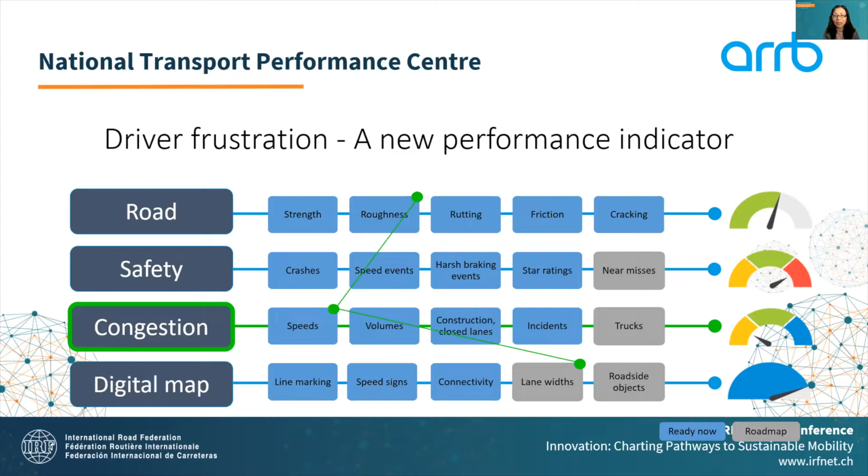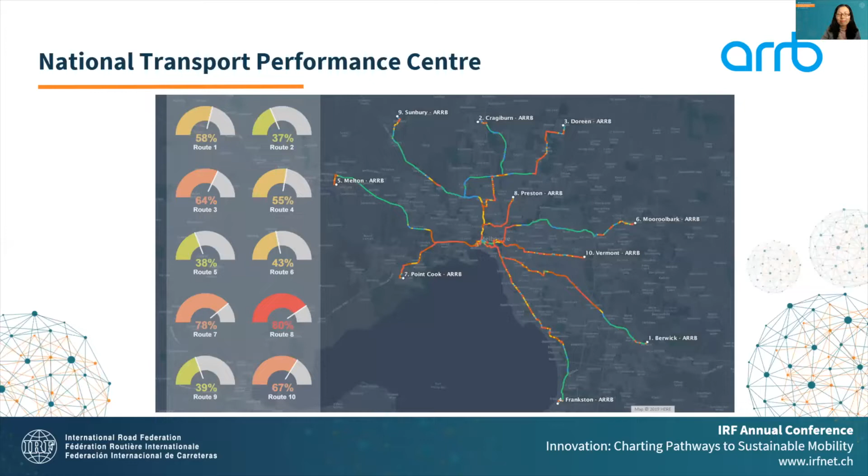I'd like to emphasize our next wave of data came from connected vehicles or vehicle-enabled data. This is another example I'd like to mention - we were able to utilize the data coming from HERE technology map, our research partner. This technology map was made available to many connected devices, such as vehicles, watches, or smartphones. The data from these devices covers a wide range of information, not only speed and location, but also information from vehicle sensors like wipers, hazard lights, and radar.

We were able to incorporate this data and create a hybrid model and data fusion to fill in many gaps of our congestion and reliability assessment. There's still a lot of potential to further utilize this data to fill in the gaps of a road conditions map.

As Australia New Zealand National Transport Research Organization, we constantly investigate or monitor the technology trend. Our investigation has confirmed that cloud connected vehicles are coming, and our vehicle OEMs are providing increasing levels of data connectivity.

Per our investigation, as shown in Austroads' Future Vehicles 2030 report, it is envisaged that by 2030 the majority of vehicles sold in the Australian market will have certain levels of data connectivity. At the same time, with the global growth of 5G subscriptions, it is also expected that more than 50% of mobile phone traffic will be carried by the 5G network by 2026.

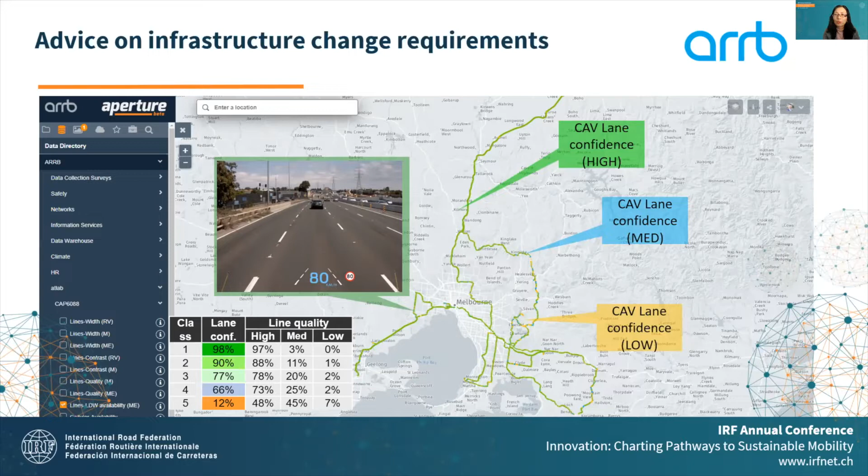Clarissa, maybe you should conclude because of the time pressure, if possible. No worries, thank you very much. And sorry. Thanks everyone. No, you can still have your conclusions if you like. One minute, okay, if you want.

Data sits on top of that, covering different sources. The logical element is the safety, operational, and regulatory element that would support a safe and efficient operation of this ecosystem. Processing and services sit on top to provide seamless services to different road users.

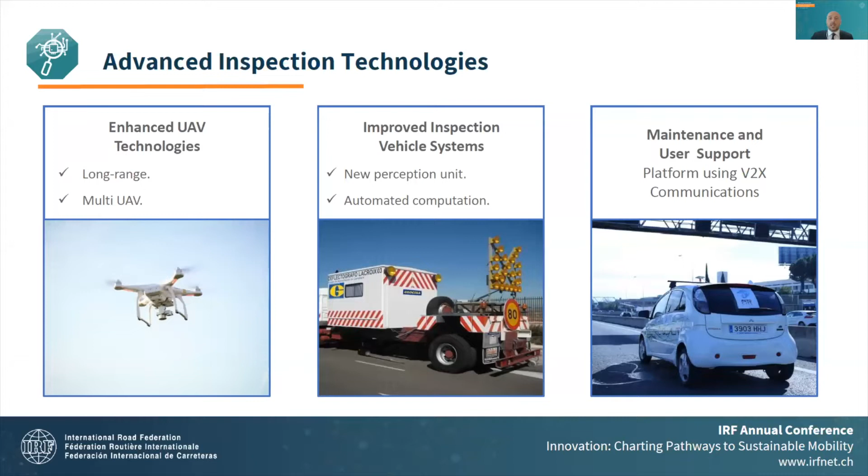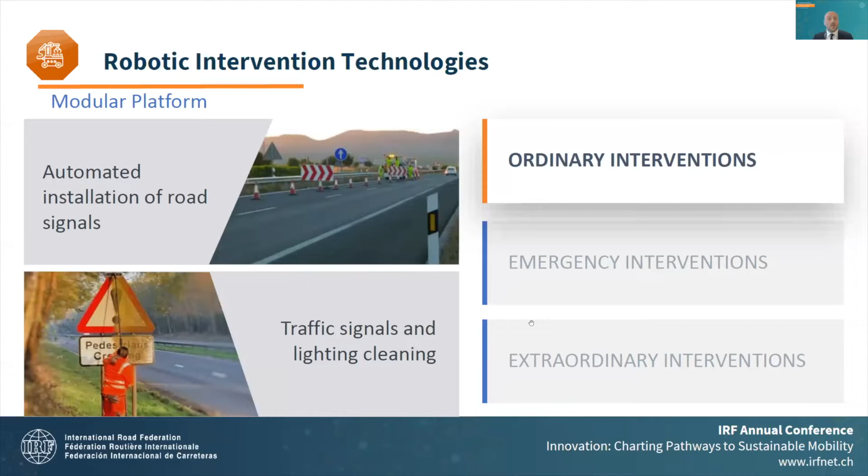Another component is the modular platform. Omicron will develop a semi-automated mobile manipulation concept formed by a robotic arm, which operates autonomously, mounted on a standard vehicle, in order to improve the safety and ease of installation of road signals on both the left and right side of the carriageway. A vision system will be developed to identify the presence of signals and estimate their relative position with respect to the robot, along with control logic to generate trajectories and activate the cleaning tool.

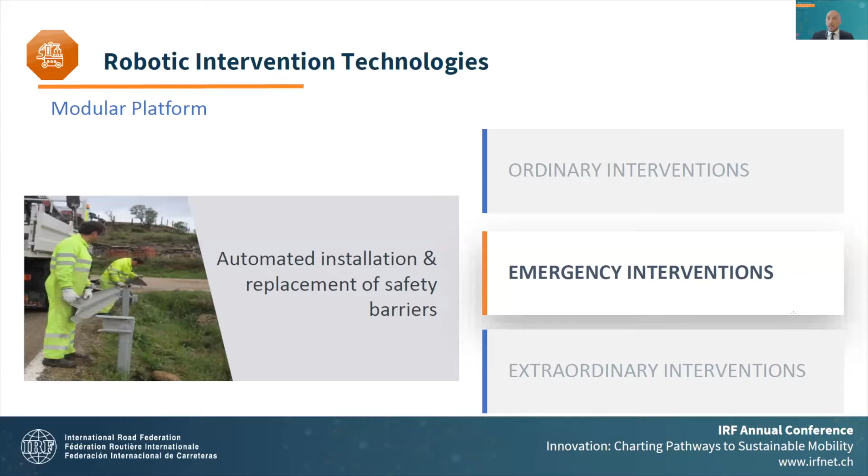Another tool is related to the automated installation and replacement of safety barriers, done by the robotic arm, which will take the barriers and place them in the right position, minimizing the risk for workers. Another tool is the removal and painting of horizontal markings, which is a very common and critical task.

Omicron will deploy a laser rod for paint removal to be operated with the modular robotic platform, avoiding the reduction in friction that can result in a risk of slip for vehicles. Regarding the sealing of pavement cracks, the current process will be automated by the use of a modular robotic arm, which will be able to operate the pipes of the machine and apply bitumen over the crack.

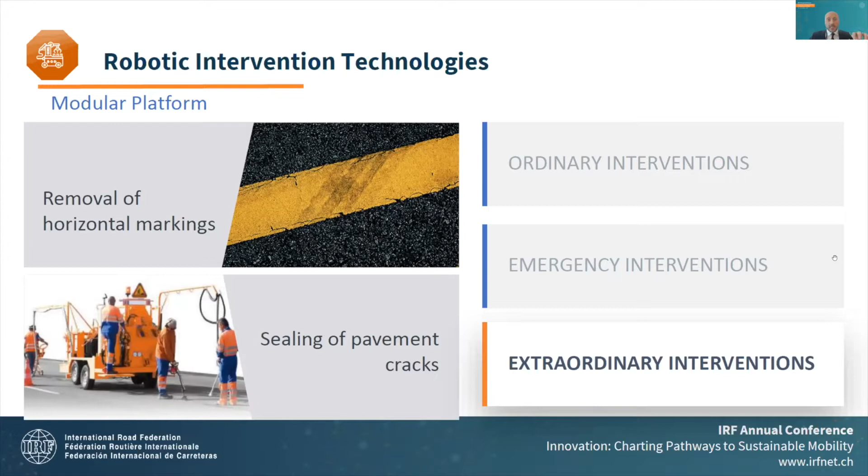Omicron will also automate the surface pavement layer rehabilitation activity, providing decision support information along the whole process, in order to improve it and enhance human operator decision, leading to a reduction in the overall cost of pavement by increasing its useful life.

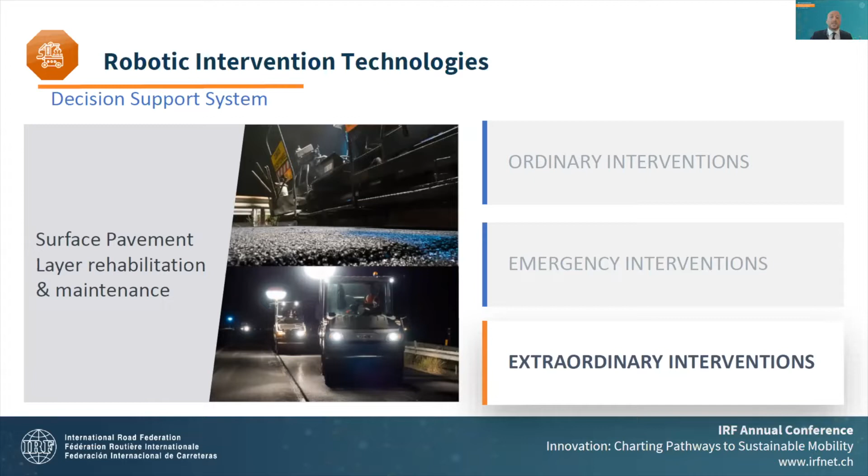We will also develop a web-based virtual reality platform that will be utilized for the teleoperation of robotic resources from a remote and safe environment. It will allow users to control the navigation of the robotic resources in real time.

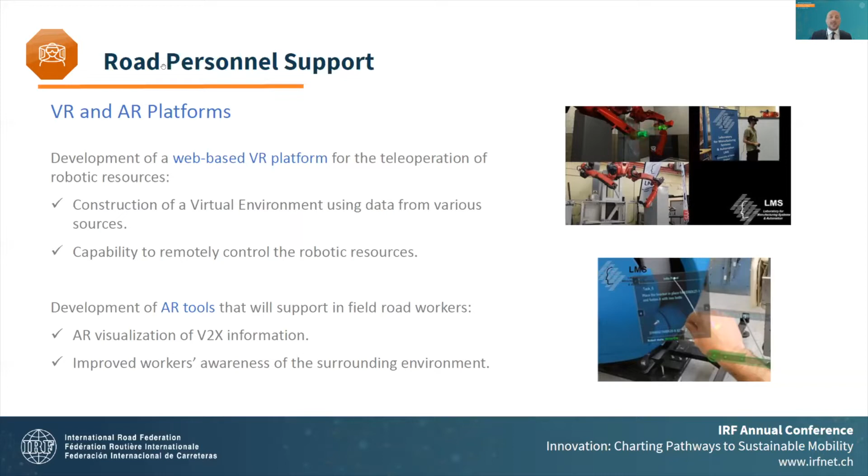The development of augmented reality tools will support in-field road workers and will enable an improvement in the management of maintenance works, providing better information capabilities that optimize the resources used, ensuring better safety conditions during the intervention.

The road asset management platform will integrate all the various technologies developed in Omicron, providing an enhanced control center with a full visualization dashboard for road operators. This will provide a more realistic experience of the state of the infrastructure and the management of the work to be carried out on the road, using information from multiple sources.

The technologies will be tested in different sites, according to the level of development, in 3 main stages. Stage 1 will test the UAV, the modular solution for bridges, and the robotic platform at lab scale. Stage 2 will test the solution deployment at real scale in 3 different sites.

A virtual one, which is the overpass of the A3 highway in Portugal. Then the second demonstrator will be on the M30 in Madrid. Demonstrators number 3 and 4 will be respectively the A92 in Spain and the A7 in Spain, part of the Mediterranean CEF corridor.

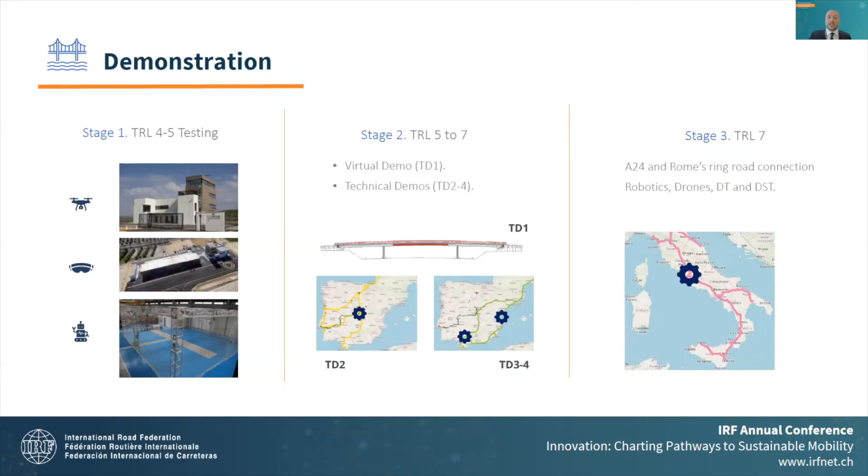Then the final Omicron platform will be tested and validated in Italy, on the A24 highway in central Italy. Going to the conclusion, innovation without impact is a waste of resources. So the project results will be measured using KPIs related to the impact of the technology on the safety of workers.

The reduction in traffic disruptions, routine maintenance cost, and the increase of network capacity. I would like to close my presentation by remarking on the importance of innovation and the added value of introducing new, cost-efficient technologies to improve motorway operational activity.

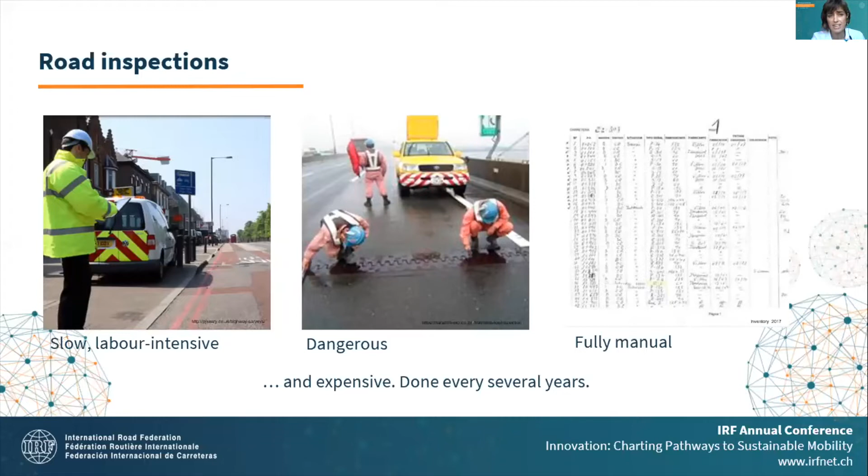So road authorities, if they want to keep good knowledge of what's going on with their assets, they need to perform thorough detailing inspections that are slow, labor intensive, normally dangerous, and fully manual, except for the solution that Federico just presented for Omicron. But even though these inspections are expensive, so they're done every several years and usually only on the main highways, the secondary road networks or other networks that don't have this kind of resources don't get this kind of care.

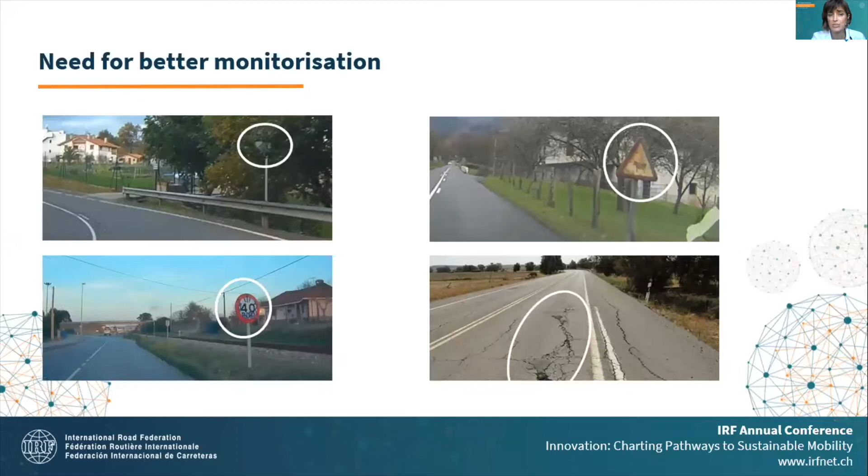And there is a need for good maintenance on the roads, especially this secondary road network, which at least in Europe is where the vast majority of road fatalities happen. They don't have these detailed maintenance inspections. So what we from ASIMOB propose is to use new technologies, to use automation in a solution to increase the frequency of these systematic inspections.

So that critical elements of the roads can be monitored daily, weekly, monthly, bi-monthly, however often is needed. For that, we have designed a flexible process that is affordable and not so labor intensive, that leaves traceable results so that authorities and road operators can keep good track of what's going on and what needs to be repaired. And it's error-free, because of course artificial intelligence does not get tired, does not forget, and does not get distracted. So our solution is composed of three main parts.

First is the data gathering part. We install small, lightweight commercial IoT devices on board fleet vehicles, normally the maintenance fleet vehicles that are going to be driving along the roads we want to monitor. These devices operate autonomously and automatically, gather video and data of the road, and send it to the cloud, where our servers will analyze it using our AI, especially designed for road maintenance.

We extract the relevant information and make it available to the road maintenance team in a very intuitive and user-friendly interface at the traffic management center or their offices.

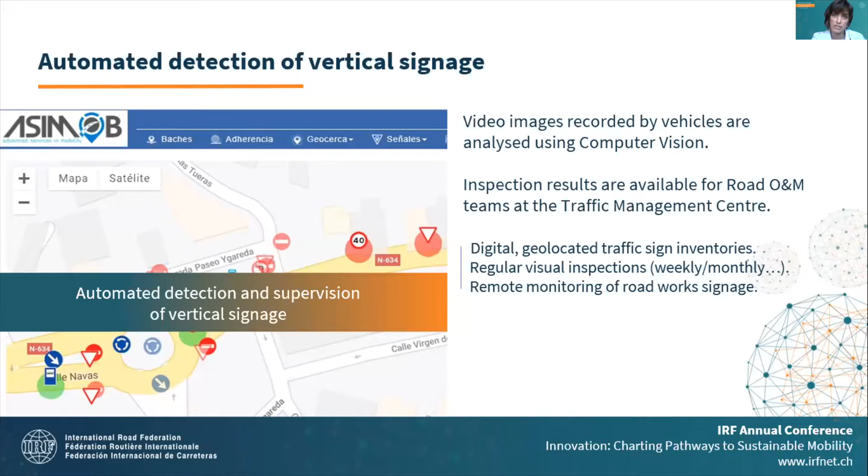After the inventory has been reviewed and approved, we can support the regular inspections, weekly, daily, or however is needed, so that each and every traffic sign can be systematically reviewed as often as needed. We also enable remote monitoring of roadworks areas, which are dangerous areas that must be signaled in the correct way. What we produce from each inspection is a map with the traffic signs, making it very easy to spot incidences. For every traffic sign, there is information about the last inspection that was performed.

Very easy, just a couple of clicks, and from the traffic management center they have access to the video recorded of that traffic sign, or the missing traffic sign if it's not visible, and also a panel view, so they can very easily check for minor damages like stickers, graffiti, branches starting to cover the traffic sign, the colors, the condition of all the traffic signs.

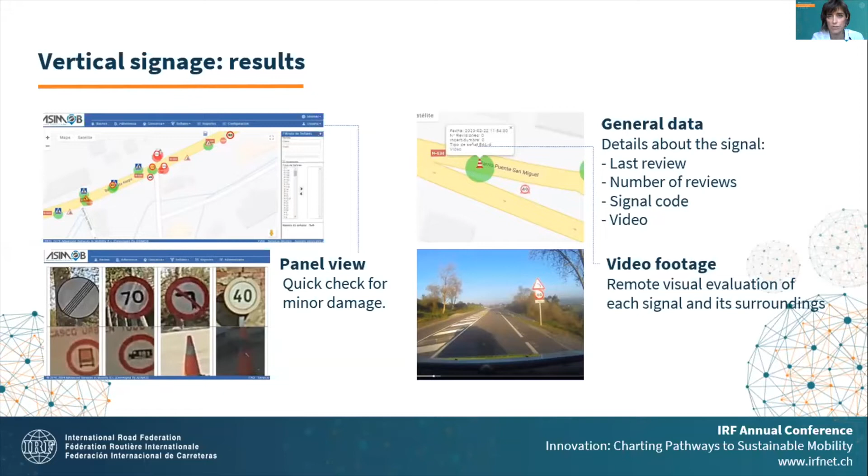So these are a couple of use cases. The first one is checking the inventory. An automated inspection was performed against an inventory, and two new signals marked in green appeared, and there were two missing signals marked in red. Just a couple of clicks, and from the traffic management center they could access video to check that, yes, the inventory was actually updated in that case.

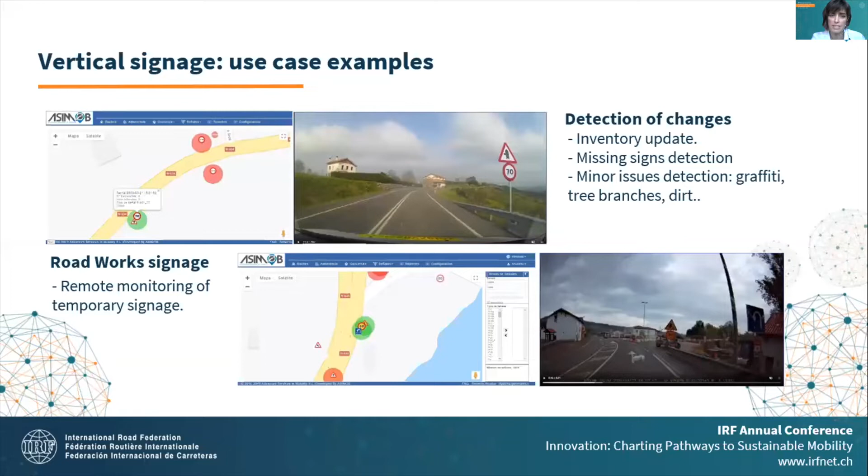Another use case is roadwork signage. Of course it doesn't come in the inventory, so it's marked in green for an incident, new traffic sign detected. Just a couple of clicks, and the maintenance manager can go and see how and where those signs are installed, to check if it's the correct installation in the right place. Another thing we can do is detect irregularities in the road surface.

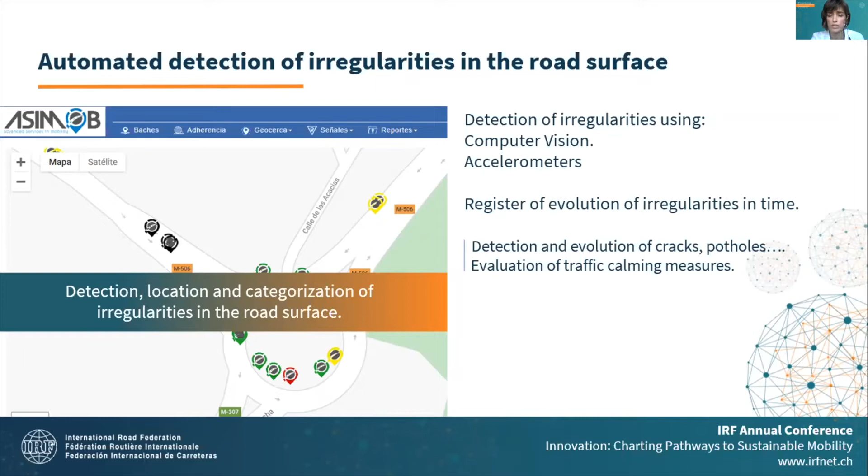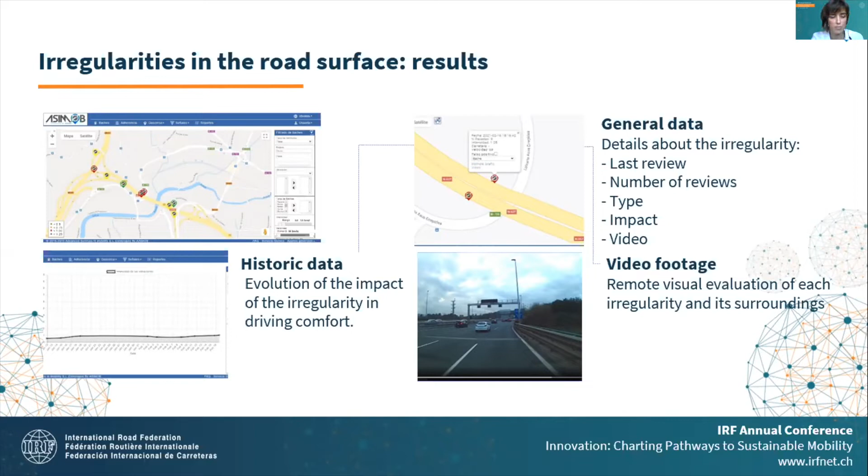We are using accelerometers, and we are adding computer vision to that, so that we can detect cracks, potholes, sunken manholes, and this kind of irregularities, evaluate the effect on the vehicles and the driving comfort, and register the evolution in time. For each irregularity, we provide a map with the scale of the impact to the vehicles.

These are a couple of use cases: detecting where the cracks are starting to appear, so they can be detected as early as possible and repair works take as less money as possible, or registering the evolution of, in this case, an expansion joint.

We work towards the autonomous inspector, so we are completing our functionality with more things. In the next few months, before the end of the year, we will have ready the horizontal signage monitoring, where we evaluate the visibility of lane markings. With that, we will have the complete horizontal and vertical signage monitoring.

It's important to stress that improving road signage has proven to be the most cost-effective way to reduce the number of accidents on roads, especially secondary roads. So with that, we will have covered all the signage, so that road operators will have information of where to act and what is important to repair or to maintain.

We're also developing a project to detect water, ice, and snow on the road, and we will continue with safety barriers and other crucial elements of road safety.

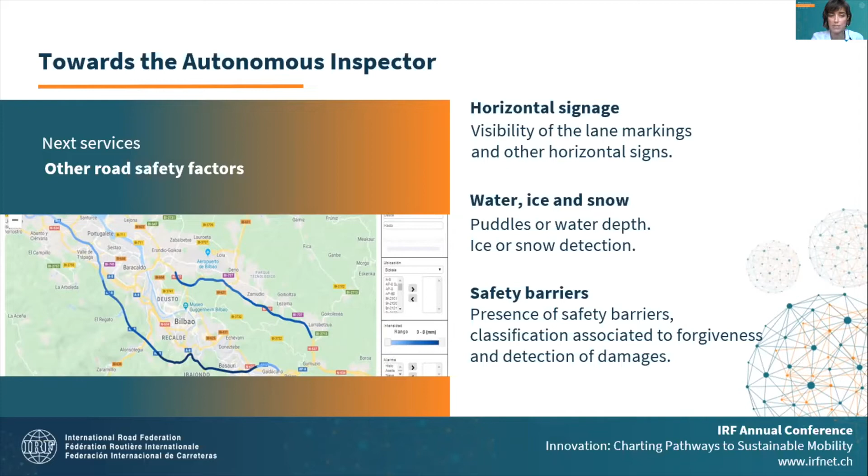We have a modular design, so we have the data collection, data processing, and client interface, as I showed. We can work with images, geolocated images from third parties, and we can integrate our results in existing platforms if needed, so we are very flexible in that.

And this is the team. We are senior technical profiles from different branches like technical services, the ITS sector, software development. We have several awards for our innovation, and we proudly have to add the IRF startup label now, which we are super proud of. We have already done pilots and projects with public authorities and private road maintenance companies, so far only in Spain, because we are a startup, but we hope to expand these works.

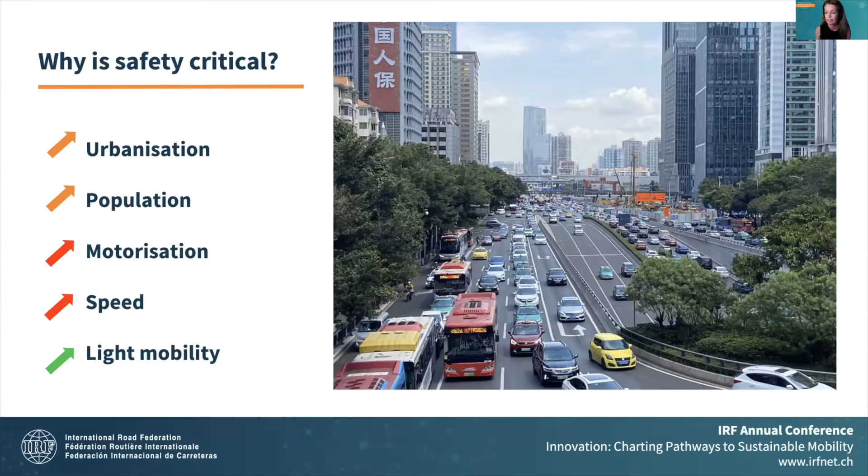But you've also got this need for better urban transport and a real shift in recent years to more light mobility modes as well. The picture you can see there actually runs straight through my neighborhood. I live in a city of 18 million people in Guangzhou in China. And this is a reality that I have to face in my daily life every day.

And so some of the issues come from the fact that safety is dealt with in quite an ad hoc way, if at all, during the road planning phase, during investment decisions, during design, right through to construction and maintenance. And the evidence of this ad hoc approach is in so often we end up with roads that just totally lack sufficient facilities and safe facilities for other road users, pedestrians.

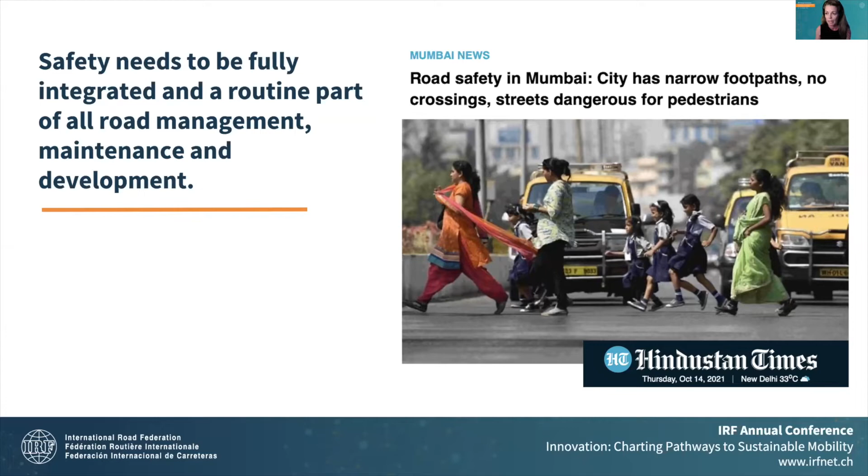And the evidence is in this stubbornly high rate of fatalities and serious injuries we see around the world. So we really do need to start thinking about safety as really being central to all of the systems and processes we use to manage and build and maintain our road systems.

So what's IRAP? I think many of you have probably heard of us, but I'll give a quick snapshot for those who haven't. So we are a charity. We've been around for about 20 years, and we have a vision for a world free of high-risk roads. We have a star rating system and road models that provide proactive ways to manage safety across road networks.

So our star rating system, you can see a map of Portugal here. Black is for 1 star, so they're dangerous sections of roads. We go right up to green, which are 5 star, which are the safest roads. And we do that for the 4 different road user types - pedestrians, bicyclists, motorcyclists, and vehicle occupants.

And so it's a very good approach to make sure that when a road is being designed or built, whatever stage it is, those that are doing that are also made conscious of the needs of other road user types, and aren't tempted to just ignore the fact that pedestrians might be using this road as well, and the road actually needs to be safe for them as well.

So IRAP's tools - our crash risk mapping, our star rating systems, and our fatality and serious injury estimation tools - have now been used in over 100 countries around the world, and we've assessed over 1 million kilometres of roads, and this has informed over $75 billion worth of investment to date.

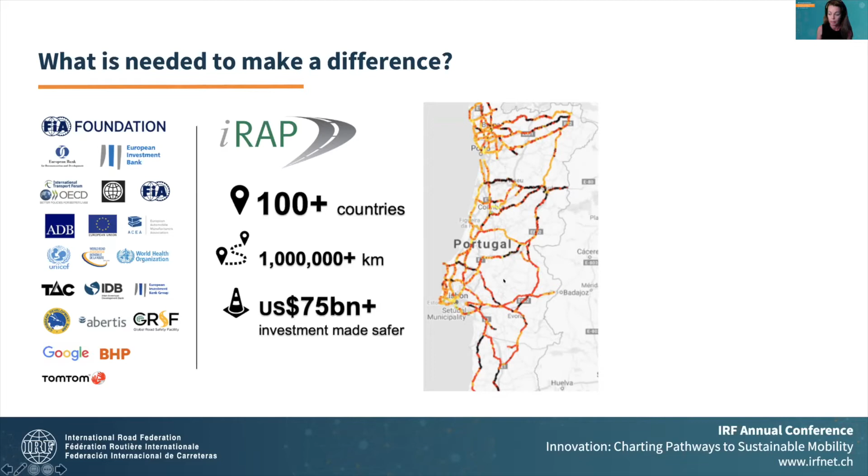We've got partners all around the world, and we've also informed many of the road safety targets, including the second decade of action, which aims to reduce fatalities and serious injuries by half, and the UN road safety targets, which require that all new roads are 3-star or better by 2030, as well as roads where 75% of travel are happening are 3-star or better.

But the challenge really now is, how do we do this on the scale needed to achieve these targets? That's where our AIRAP initiative comes in. AIRAP is pretty much about harnessing the emerging and existing data that is around in order to make road assessments and road safety much quicker to do, cheaper, and more effective.

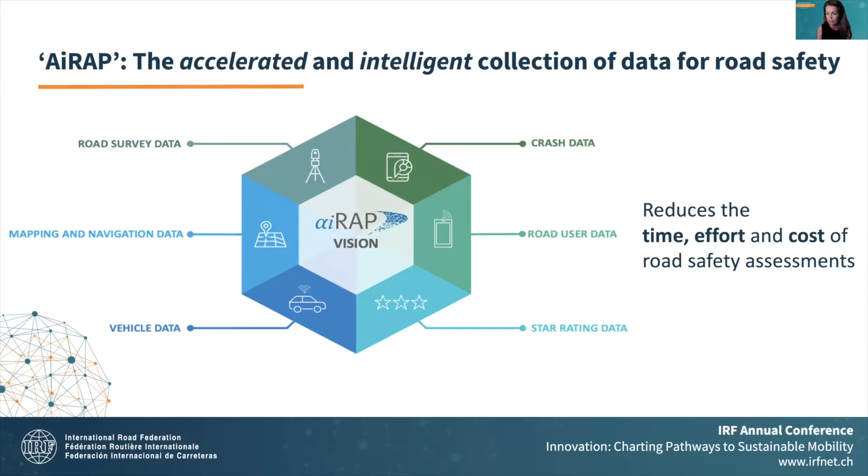And so the sorts of data we're looking for is mapping and navigation data, data from vehicles, crash data, road user data, and so on. The real objective here is to enable access to data.

Data often exists in Europe. It's very fortunate that there's quite a bit of data around, but actually putting this into the hands of road authorities and enabling that access in order to scale up those activities, there's so many barriers and so many challenges. It's really about reducing those barriers and challenges.

To do this, we're essentially aiming to do two things. One is an accreditation scheme, which takes data that might be out there and puts it into a format that is easily used and can be readily plugged into either road asset management systems, road assessments, or for other purposes.

And then the second element is a data platform. This is really a global platform, if you like, that aims to connect those that have data to those that need the data.

Doing this has lots of potential. We get the data standardization and validation, which is really lacking in the data space at the moment. We provide a portal for that exchange of data, but it also unlocks other aspects and potential, where star ratings and safety assessments can become very routine parts of road asset management systems.

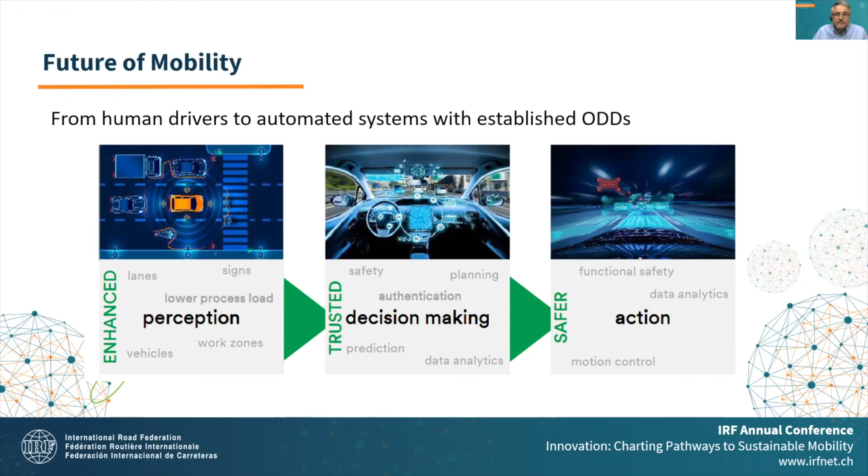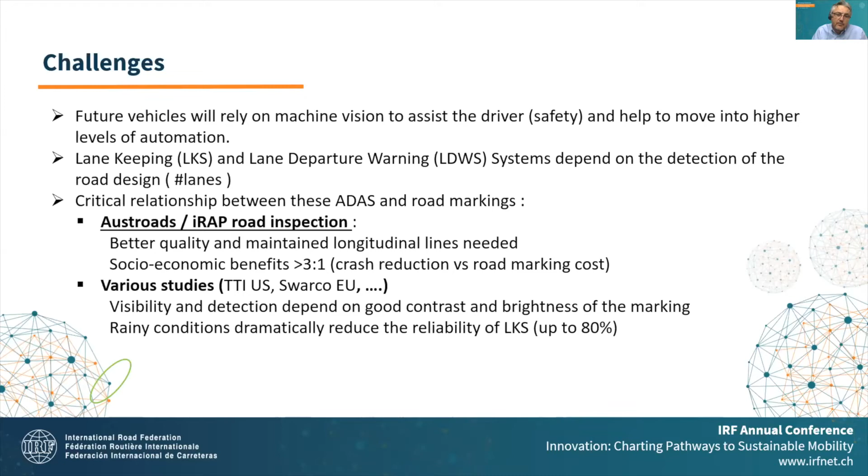The relationship between driver assistance and infrastructure has been mentioned already a couple of times, and more studies are showing the importance of road markings and traffic signs in relation to driver assistance. The European Commission has put it in their big objectives on Europe on the Move, and this third mobility package in Europe will come, because next year we will see the first implementations already. The general safety regulation will make lane keeping systems, intelligent speed adaptation, adaptive cruise control, a whole range of driver assistance, mandatory in the next generations of vehicles, and by 2024 every vehicle will have to have it.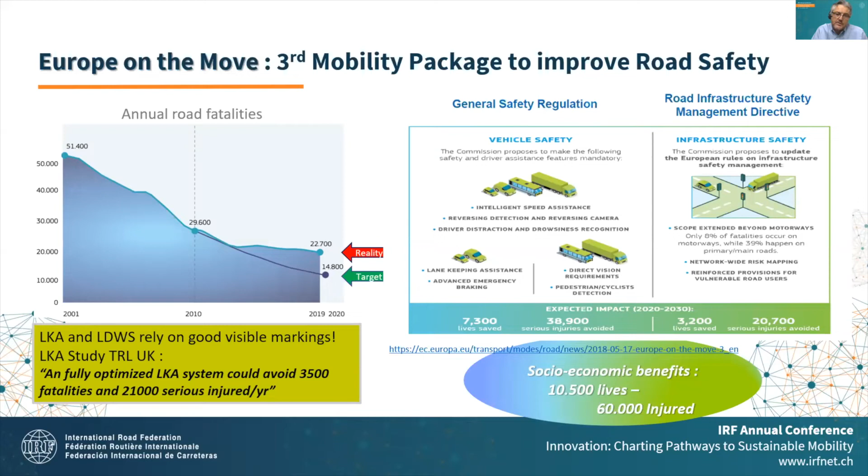Studies have shown that there is a good relationship between good road quality and these driver assistance systems, so the objective to reduce accidents and save lives is possible. Of course the debate on roles and responsibilities is another discussion, which is sometimes frustrating - what is the role of the authority, what is the role of the car company? And of course the driver for the moment is still in control.

From 3M, we have tried to bring a little piece to the puzzle, a little solution, as more and more studies also indicate that driver assistance, road markings and rain don't match together.

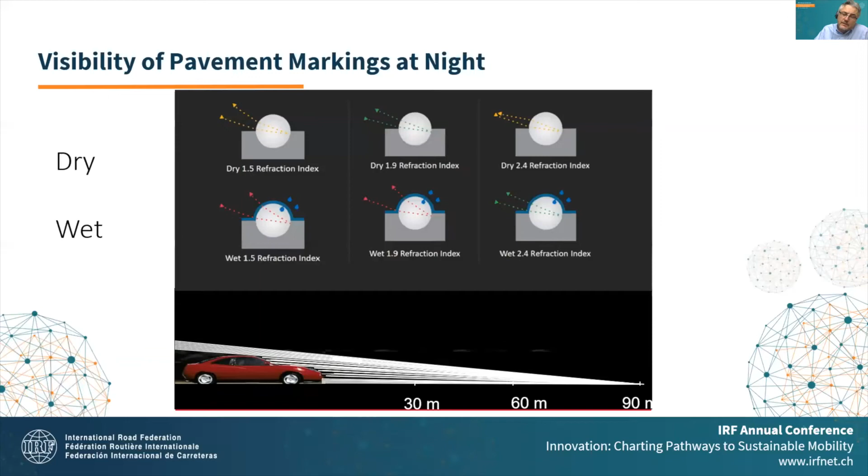So the glass beads, which make road markings visible when they get wet, are no longer able to return the light. So there is technology there that will help to make these road markings visible when it rains. You just blend in other refractive index beads that compensate for the confusion, or let's say the direction of the light that is disturbed by the water layer.

The test that I wanted to share in the next minutes is one of the challenges that you have as a company in innovation, is that you can't go on the road immediately with new technology. So you are either limited to the laboratory, or you have to downscale the tests in order to validate the material that you have. We did not exactly want to look at the impact on driver assistance, we just wanted to see how different types of beads and different types of road markings could influence the clarity of the picture that would then be analyzed by the algorithm in the ADAS system.

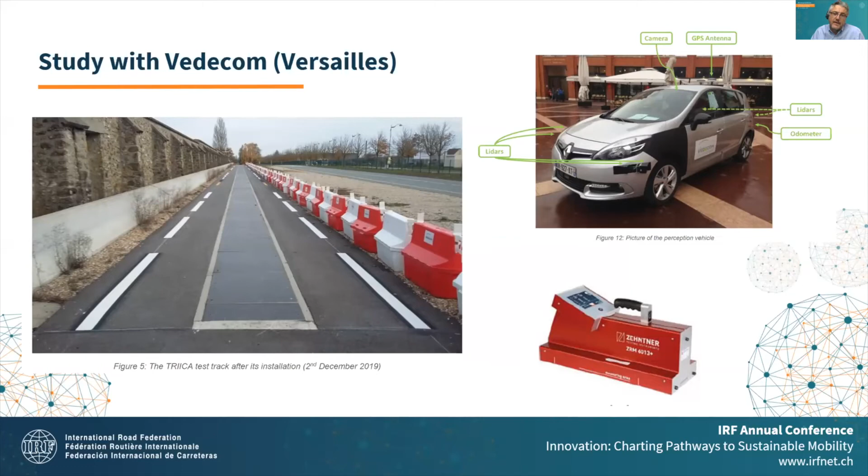So we worked together with Vedecom, which is a renowned institute in France and based in Versailles. They looked at several markings that had the whole range of performance, from being visible with having the beads that should be visible during the rain, all the way to a black marking that is used to cover existing markings in work zones.

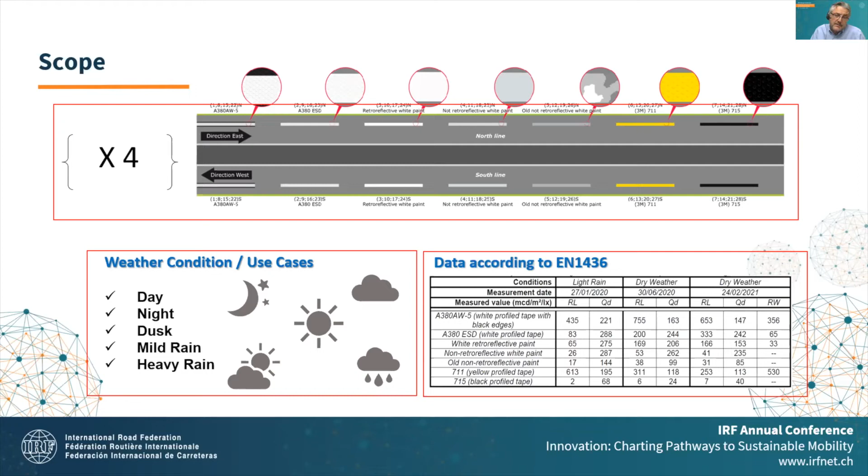So we wanted to make sure that this black marking did not create any false positives. The study was really done to identify these markings clearly by the vehicle. And even technology was used, which is not available in the car today, to make sure that the sensor would not be confused and really look at the marking itself.

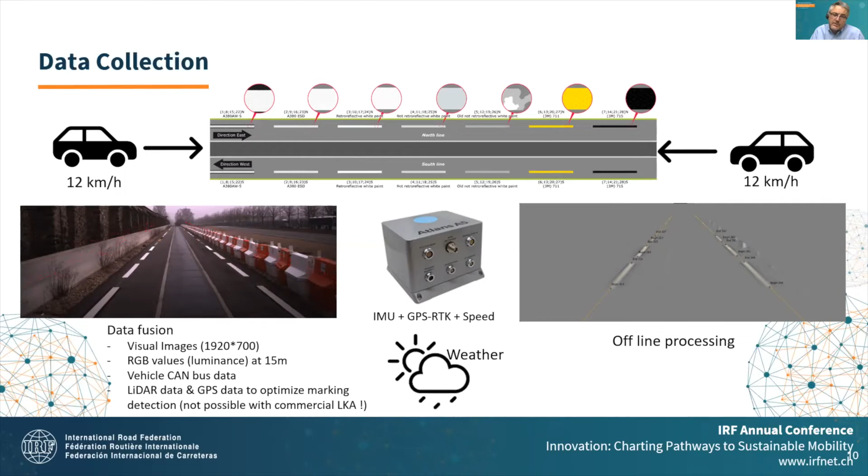Here, the picture on the right, you can see that with all the data fusion, the marking, if visible, was really part of the picture. So we looked at the contrast, or Vedecom looked at the contrast from the luminance of the marking compared to the luminance of the road surface beside the markings.

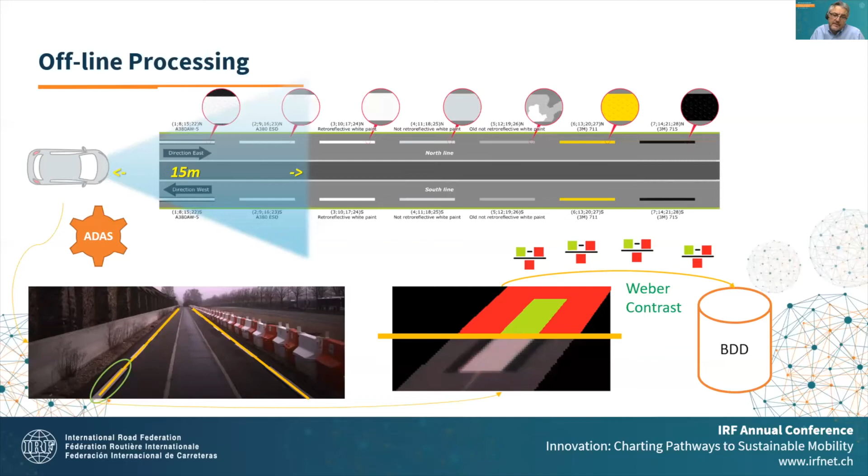Here we used only asphalt. If the measurements would have been done on concrete, the contrast would have been totally different. We also looked at visible, how it compared to the human eye, and you could see that during the day, the brightness of the marking plays a big role. Yellow is a little bit more difficult to see. And if the sun is in a glaring position, sometimes you get totally the opposite effect, that some markings which would not be visible suddenly become visible, just because of the mirror effect of the sunlight.

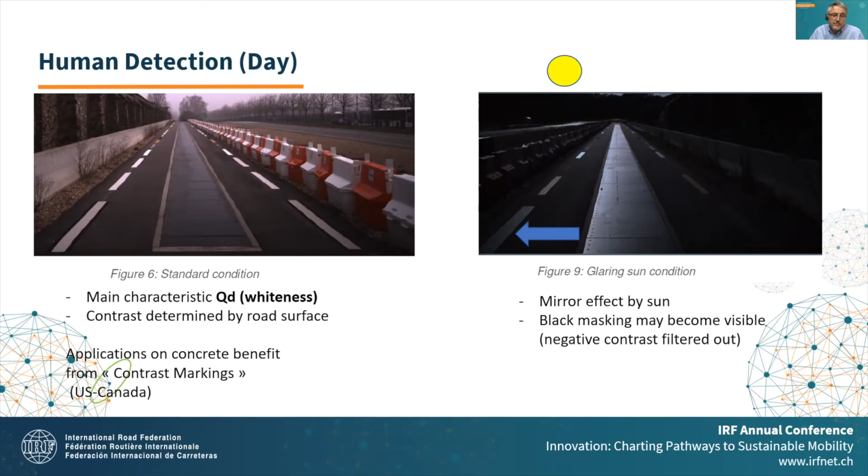During the night and rain, here again we saw differences. Here the reflectivity plays a big role, and of course, when the marking gets wet, some of them disappeared. In some cases, we also observed, this was not planned, but this was a benefit, that road furniture, which is often used in construction work zones, the reflection of this road furniture could be very disturbing and make the road markings even more difficult to see, also to the human eye, but also then to the camera.

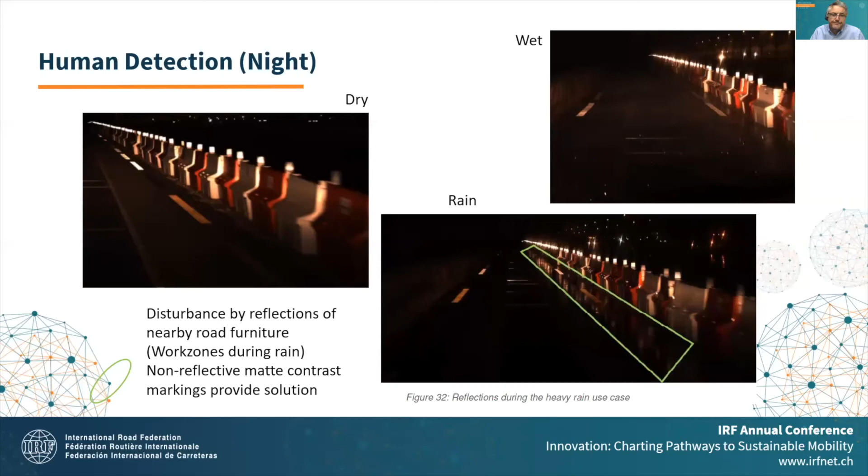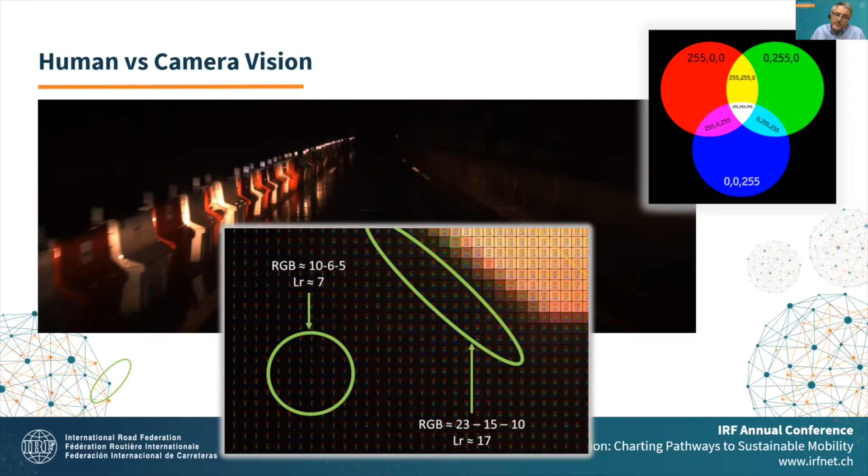The way we collected data is, of course, you compare human vision to machine vision, and here a camera is looking at pixels, and is then looking at the brightness and the color of these pixels, and then the algorithm has to be able to decipher the object. Is it a road marking or is it not?

The way we collected the data, as you can see, we measured contrast, but then the column to the right is also showing the confidence. How much data points did we collect? Did we get 100% of the data points that we wanted to collect? In some cases, you could see that the visibility of the road marking or the weather situation would not allow us to collect a lot of data.

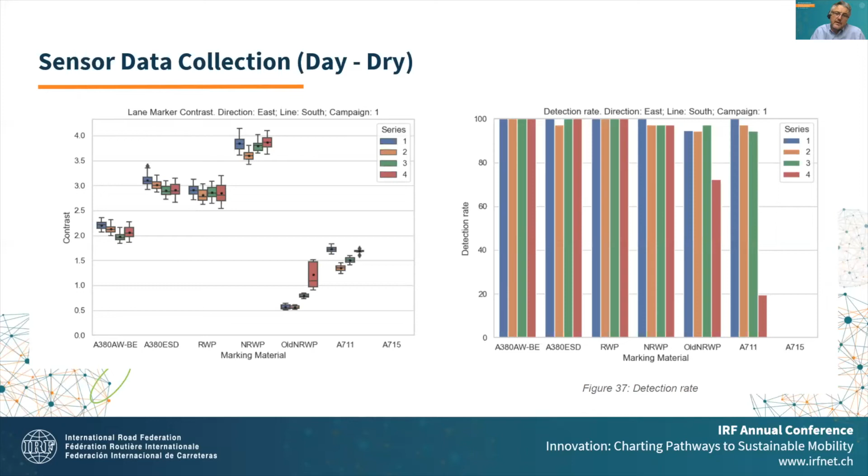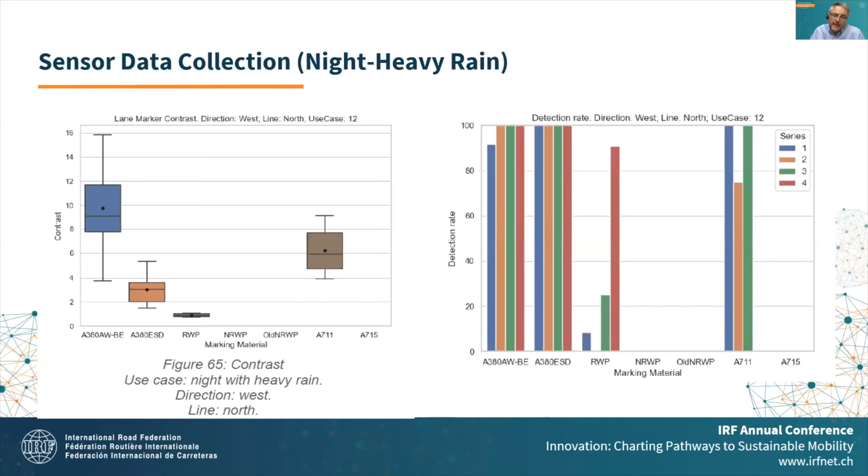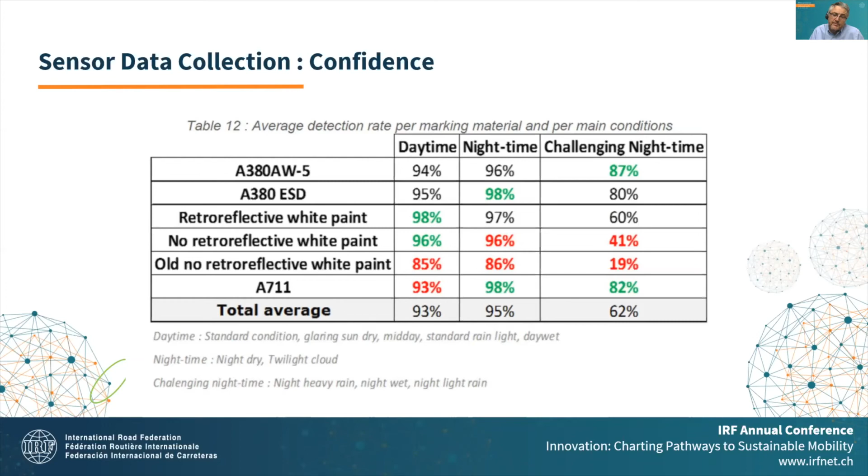This is also quite important. Some of the data, the contrast was quite easy to collect, but in some cases the sensor obtained much less data than we expected. That means that the sensor was not able to collect all the data. So here you can see that the rain really had an impact on the collection of the data. Some markings were only visible, let's say, 20% of the time, where other markings would be visible 90% of the time.

The overall conclusion is that during the day, whiteness plays a big role. The marking without beads was, of course, the most white, and you could see a slight benefit of having most of the white pigments at the surface not covered by beads. Even the camera picked up this slight difference and gave it a slightly better contrast rating.

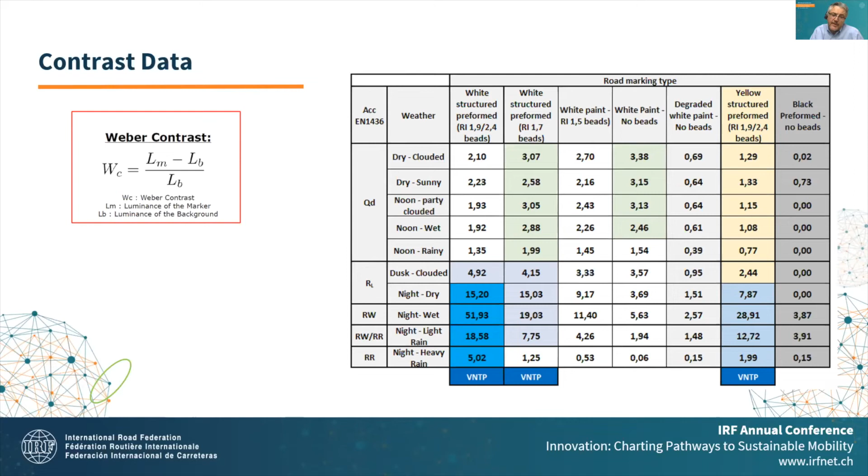But the overall conclusion is that it's very difficult to get a high contrast in daytime. You see bigger differences at night, when suddenly you have a very dark background and the contrast is much easier to measure. You can also see that some of the markings had difficulties being visible in wet or rain conditions.

Only the markings with special beads provided enough contrast to be picked up by the sensor. Another thing to mention is that since we measured only 15 meters in front of the vehicle, there is also an impact from diffuse illumination by the headlamps. The further you look into the distance, the more the impact is really defined by the beads and their ability to return light back to the vehicle.

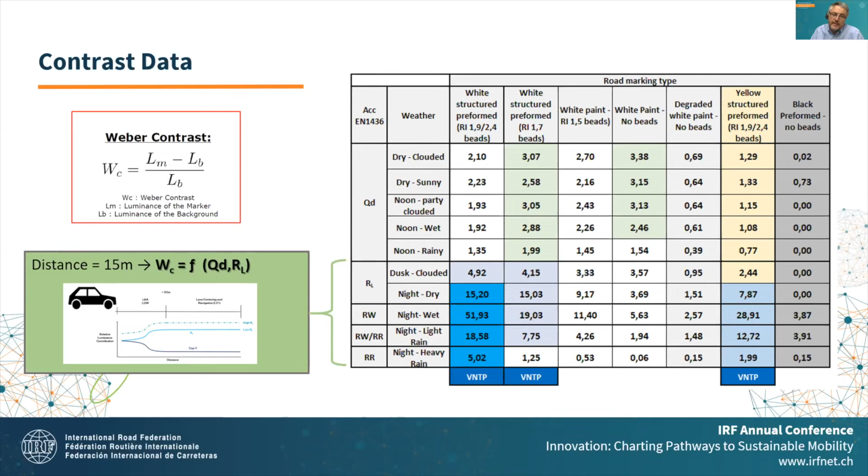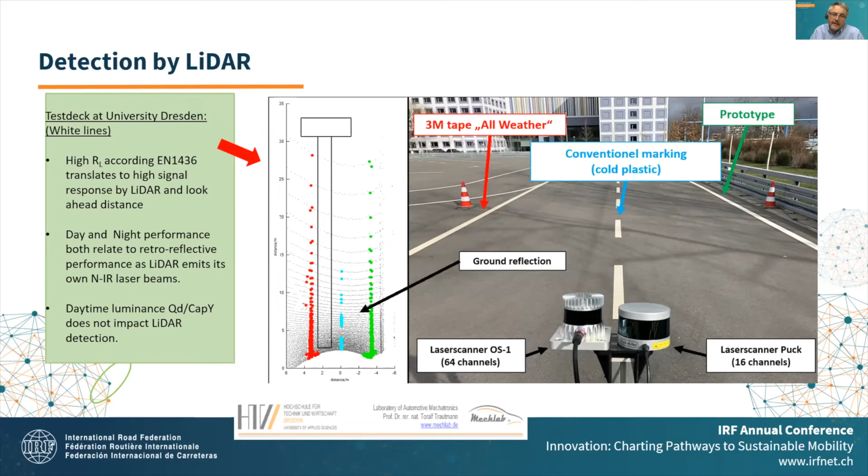We also looked at Lidar. Lidar showed a very similar profile to light itself. Road markings that are very good for visible light also seem to be very good for Lidar. The only difference with Lidar is that it sends out its own near infrared light, so sunlight doesn't make any difference. You always have nighttime-type conditions in a Lidar environment—there is no difference between day and night for Lidar. It always depends on the light that the Lidar sensor is sending out.

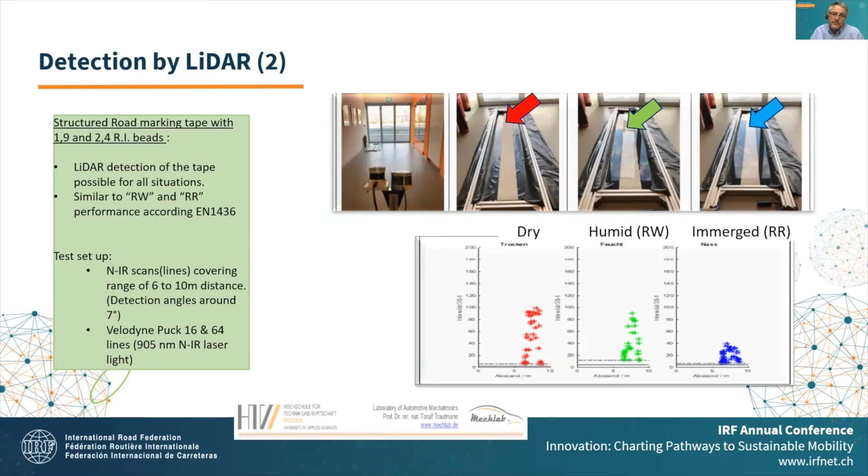So overall, we can conclude that for daytime, the visibility of the road marking is very important. The standard EN1436 is capable of helping authorities define this daytime brightness. Also, the European norm 1436 is capable of helping specify road markings that are visible both to Lidar and to traditional video cameras.

And of course, if you look at the wet reflective properties, the European norm with the RR properties and the way to test it is available to make sure you can specify road markings that have the capability to be visible during the night and in rain. The relationship to the background is very important, so more details of the studies are available—I just did not want to go too deep into the study today.

Thank you, Angelo. Back to you.

Thank you very much, Rick. Excellent presentation and indeed a very good benchmarking. We can see what we have to do and solve for automated driving in the future from the infrastructure side, and I think you pointed out which sensor where and how we could or should fuse those. There is one question for you, so I will read it out from the audience.